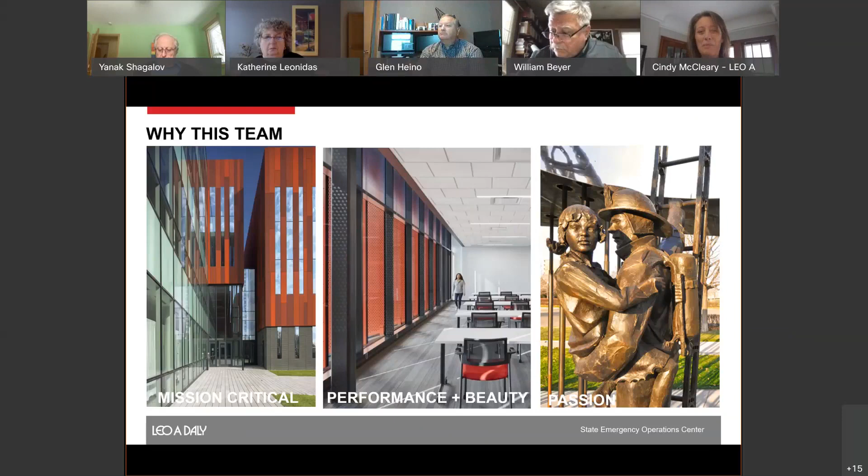My name is Cindy McCleary. I'm an architect. I'm the managing principal of the Minneapolis office of Leo A. Daly, and I'm the principal in charge on this project. And we brought a high caliber team to you today. Not only does Leo A. Daly bring this experience in the over 106 years that we have with expertise in Fed, BLAST, life safety, public safety, emergency management, we also brought a powerhouse team of Dunham engineers. And Dunham and Leo A. Daly have a long working history on mission critical facilities. We've done over 46 in the last 3 years together.

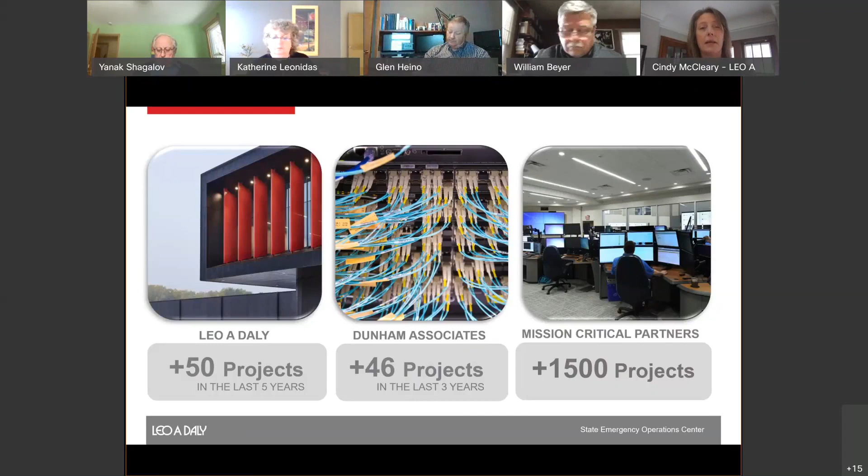And you're going to hear them talk a little bit about how they apply mission critical work to projects. And then we also brought Mission Critical Partners, who by far, hands down, is the national leading expert in these types of facilities. Not only have they done over 1,500 of them, but their 140 staff people are former emergency managers, public safety professionals, and emergency management professionals, and they bring the operational planning as well as some of the technical and logistics planning to the table. So I can't wait to introduce the rest of the team.

Thank you, Cindy. I'm Josh Hoyord, the project manager. Our core team is organized with a focus on programming and performance. Our program team is made up of Linn, Matthew, Pat, and Marcy. This team will help with site selection and conduct the programming efforts. The performance team includes Joshua, Tom, and Melissa.

This team will focus on the technical aspects of this facility, working closely with you and the programming team to ensure that the proper redundancy and technical performance is in place.

As the project manager, I will bring valuable lessons learned from delivering mission-critical facilities across our country, working with multiple agencies and stakeholders who have ongoing missions of their own to support, in addition to providing valuable insights to the design process. This has helped us refine the project management plan to define the proper scope, schedule, and accurate budget.

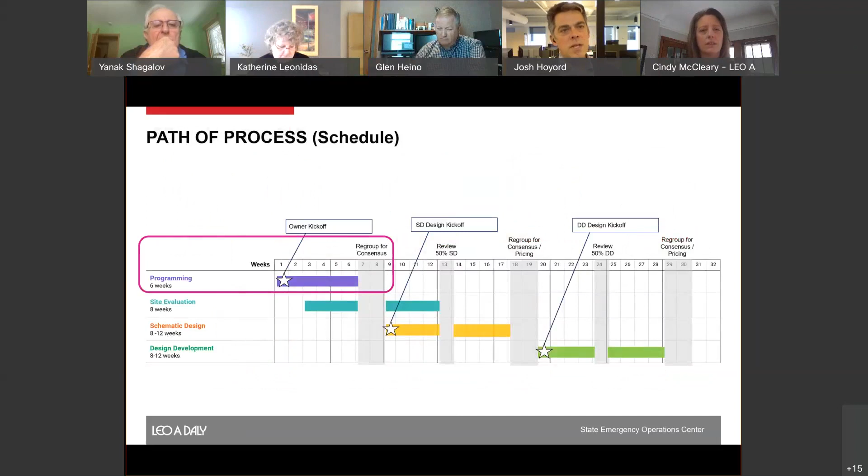We spend the time needed to develop the management plan because we know you're actively managing ongoing emergencies, and we value your time and want to make the most of it. The project management plan consists of the following items: communication plan, which identifies stakeholders and their roles and responsibilities, goal setting, risk assessment, and mitigation plans.

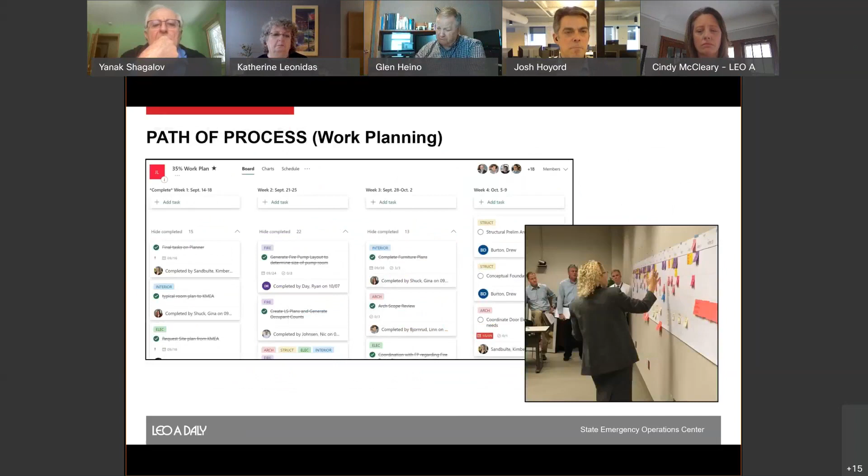Schedule development with pull planning exercises, where we utilized WebEx, Microsoft Teams, and Planner. A rigorous quality assurance and quality control plan with independent technical reviewers is used with Bluebeam Studio to allow for a secure cloud-based collaboration where we track, check, back check, and close out the review comments.

Last but not least, our construction budget analysis is done in concert with our construction cost estimator and integrates the selected construction manager at risk. This proven framework supports the creative process, encourages stakeholder engagement, captures the key design goals, and mitigates any potential risks during the design and construction phase.

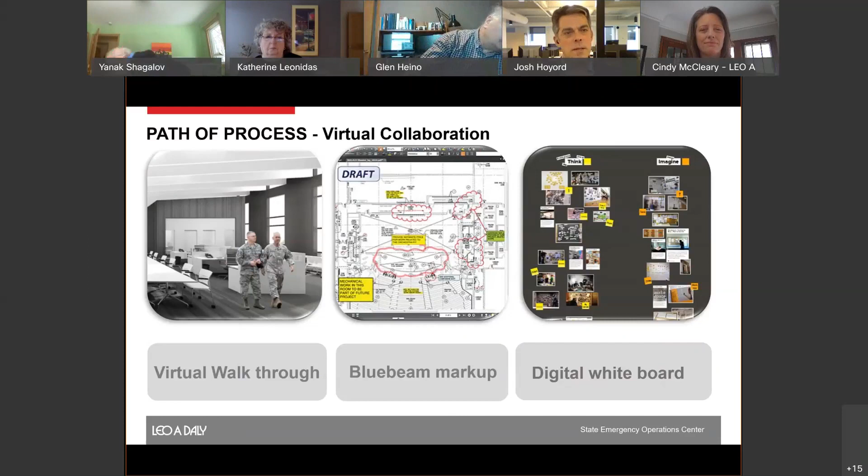With that, I'd like to turn it over to Linn Bjornrud, our project architect, to talk more about the planning and programming process. Thanks, Josh. So I'm Linn Bjornrud, and in my role as the lead architect, my charge is to ensure quality. Quality in our processes, quality in design, and most importantly, quality in our ability to execute your vision.

And while my commitment includes full engagement from pre-design through occupancy, I will be leaning in more heavily at key stages. For example, during the programming process, Matthew, Pat, Marcy, and I will be leveraging our collective experiences with emergency operation centers, mission critical design, site selection, and secure military facilities to provide diverse perspectives and guidance throughout that process. We value an engaged process, and it's during these programming exercises that we begin to understand what's most important to the users and the stakeholders.

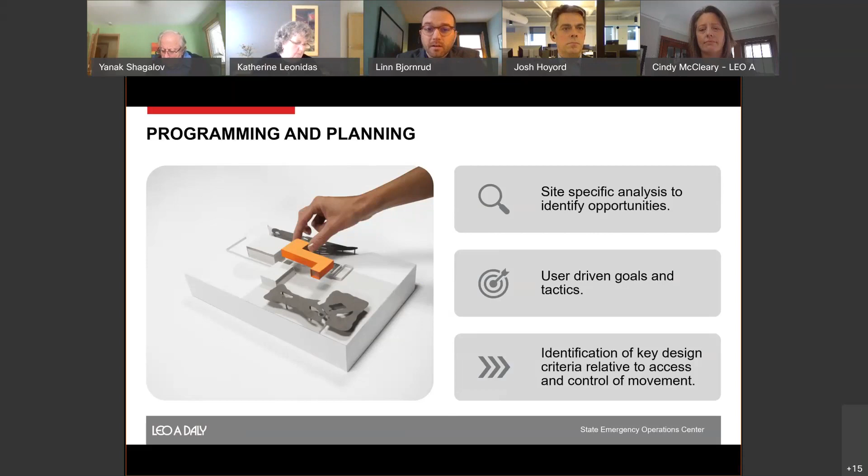It's also where we start to develop really critical design criteria related to the facility's resilience. And with our understanding of the implications of SCIF accreditation, ATFP compliance, and other military-based standards, we will help to navigate the difference between using these standards as a guide compared to formal compliance and accreditation of them.

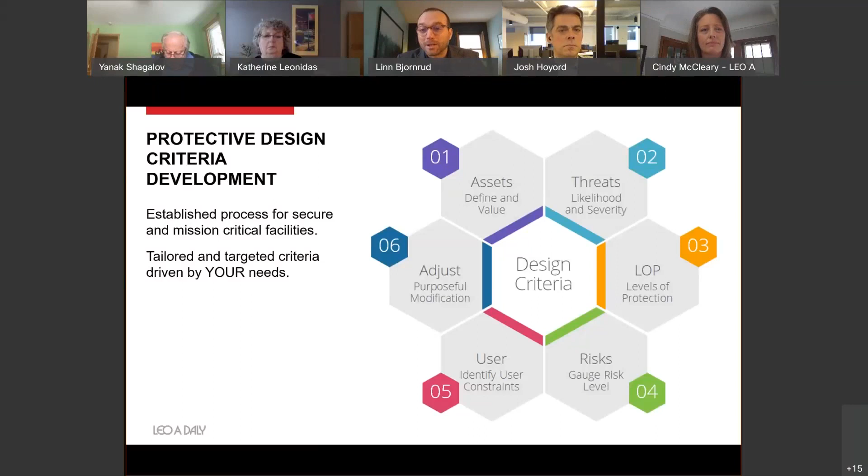And really that question will reverberate through the project, and it'll serve as a sounding board and a litmus test for us as we move through the project to identify the choices that we're making and assure that they're on target. It's essential that mission critical facilities focus on threat mitigation and resiliency, but let me be clear, achieving bunker-like performance does not require a bunker-like experience.

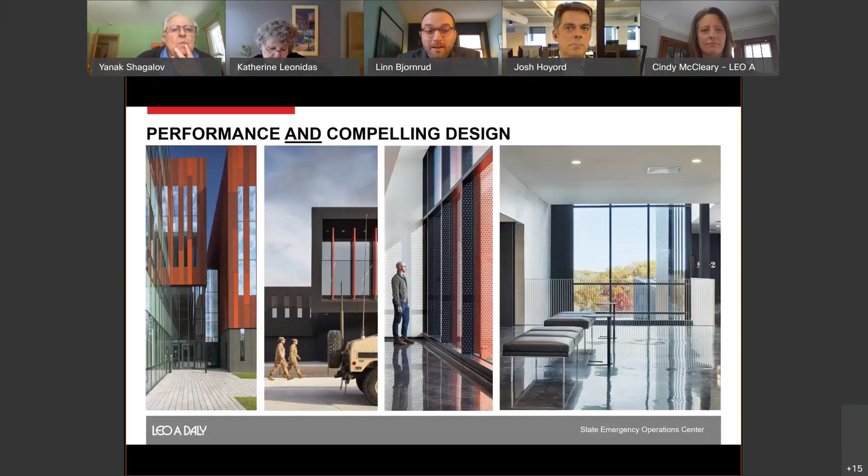As demonstrated by the project examples shown here on the screen, the Arden Hills Readiness Center, which was designed to accommodate fluctuations from 50 to 750 occupants, and the Intelligence Community Campus in Bethesda, Maryland, whose purpose was collaboration between multiple agencies, high-performing projects can be beautiful, and mission-critical constraints do not inhibit design. Next, Matthew's going to share a little bit more about his EOC-specific experience and the process of shaping spaces that not only support the functional, but also the experiential needs of the users.

Thank you, Linn. Good morning, everyone. My name is Matthew Keenan, and my role is the project designer. On a personal note, and as Cindy said towards the beginning, I too have a passion to serve those who serve others. I focused the majority of my career designing facilities for those in high security and high stress environments.

In my role, I'll work hand in hand with Linn on process and bring years of experience, layout, and system approaches to EOC design. In addition, I'm also a main point of contact, and I'll be coordinator of our engineering team and really our full team, as well as coordinating directly with you and the various user groups. We understand how critical it is to organize these types of spaces, ensuring this is a flexible, technical, highly effective functioning project and building. Our process in accomplishing this is built upon understanding you and your needs.

We like to use a day in the life approach, as determined with you, for both the use and the functional needs of the space. That helps us develop and evaluate scenarios with you and ensures the most appropriate layouts are considered, fully vetted, and we meet your mission. We focus on designing your facility around the operations and you, the users.

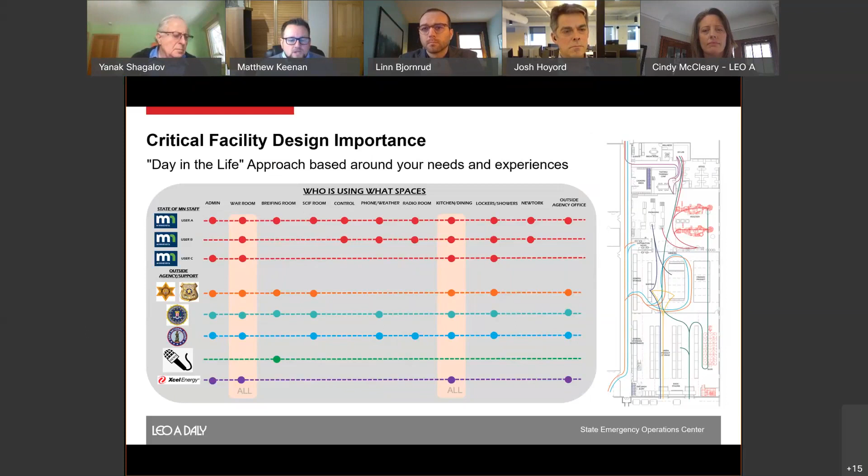We know the importance of separations, both physical and network-based, as Pat will mention a little later, and also the need for controlled areas and select barriers that can be enforced or not, depending on what's happening. One such consideration being providing a media dedicated entrance with limited interaction past a briefing room. Another being dedicated staff parking, so that people don't feel like they're being watched as they're coming and going. And those are just a couple examples before you've even really entered the facility.

We also place a lot of importance in the value of connection and flexibility of these types of buildings. We find a spiderweb type approach around the main incident room and war room is really critical and breeds success for these types of projects. A lot of these spaces have to blend around that same room and have interactions to this room and others. We like to take that day in the life approach to really make sure we get those adjacencies correct and really balance that connection and that movement.

Excuse me. Next slide, Kel.

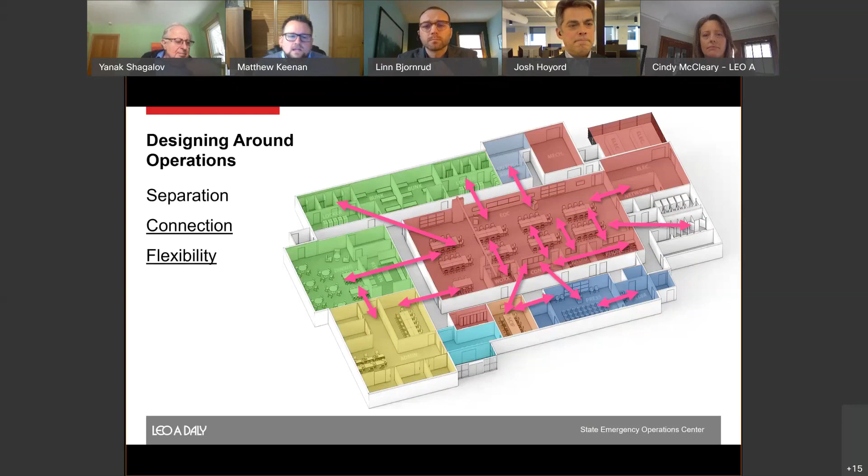One of the big key factors that we also consider is the human experience and wellness of this project. It's not just the IT and the building performance, it's also that human experience. And we really focus on using natural and soft materials so that we can provide spaces for decompression, isolation as needed, which are softer, warmer potentially, spaces for sight and visual separation to the exterior, and just really providing that human experience so that we can ensure that people have good wellness while using this facility.

We take a lot of these approaches that we know and that we bring to the table, but also really want to work with you and what you know and what you've developed, especially given this past year, and potentially change to really make sure we give you a facility that's going to work well.

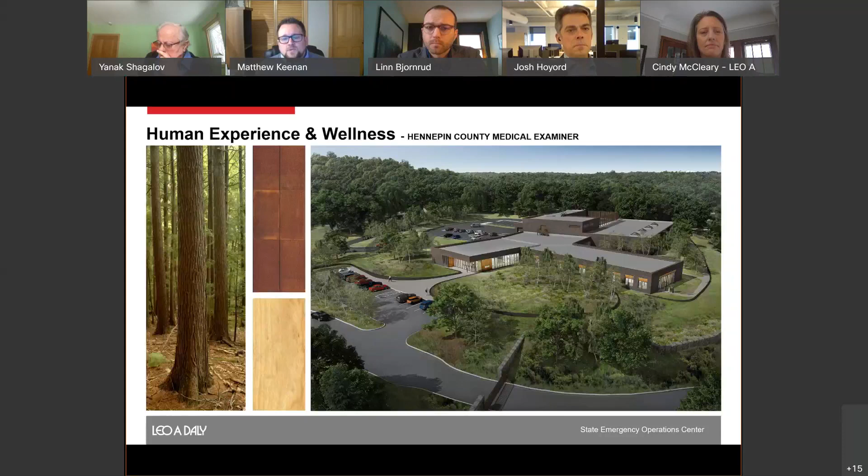A project case in point for the human experience would be the Hennepin County Medical Examiner project that I'm working with Marcy on right now, in which we really took the site into consideration and designed a building that took the exterior and made it something that was useful and could be used by staff, but also looking at natural materials, things of that nature that really helped ensure that human experience was foremost a consideration. Working with Pat, Mission Critical Partners, and the rest of our team, we really make sure that this project meets your needs and hits that vision and that mission.

Sure, and I'm Pat McFeely from Mission Critical Partners. We'll work closely during the programming stage with Linn and Matthew for figuring out how your operations actually work. One of the key design features of an emergency operations center is ensuring that the operations center is designed around your operational needs, not designing your operational needs around the center itself.

We'll take a look at the operations. We'll take a look at the critical use of data that you'll want to use throughout the facility. And we'll also take a look at the technology infrastructure, not just the building systems, but also your specialty systems like your SCIF room or your radio communications and phone infrastructure, to understand how it will all work together and ensure that the facilities are designed around that. We'll also take a look at changes in emergency operations centers that we're seeing due to COVID, be it traffic flow, increased airflows, or just being able to virtually use the space for separation of your personnel.

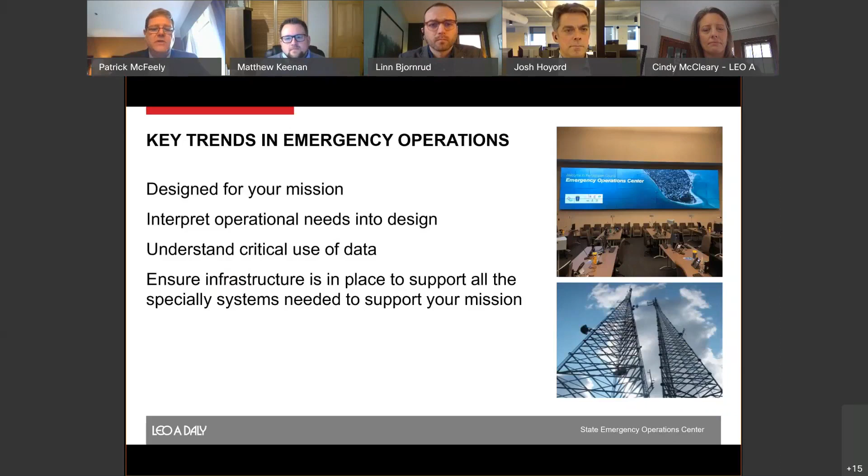Once the programming is done, we'll work closely with Joshua to ensure that the infrastructure is put in place to support your specialty systems. And I'll let Joshua talk a little bit about the building systems. Thank you very much. Hi, I'm Joshua Kam, electrical engineer. I'm here to help coordinate the power, lighting, communications, and other low voltage systems for this program. The utilities in this program cannot fail. Power, secure comm, water, gas, HVAC, loss of services is just not an option.

EOC ops is already stressful, and any disruption complicates coordination between the many agencies. This team will work with the program managers and directors and design for the appropriate level of redundancy and resiliency. We will validate the service connections and harden against inclement weather and terrorist actions. I'm a vet and now a traditional guardsman that was on state active duty this past year. Service continuity is my priority. Emergency managers must have a safe and reliable place where they can make decisions and communicate those decisions, whether it's during a pandemic, civil disturbance, protests, or disasters such as a flood, tornado, or fire.

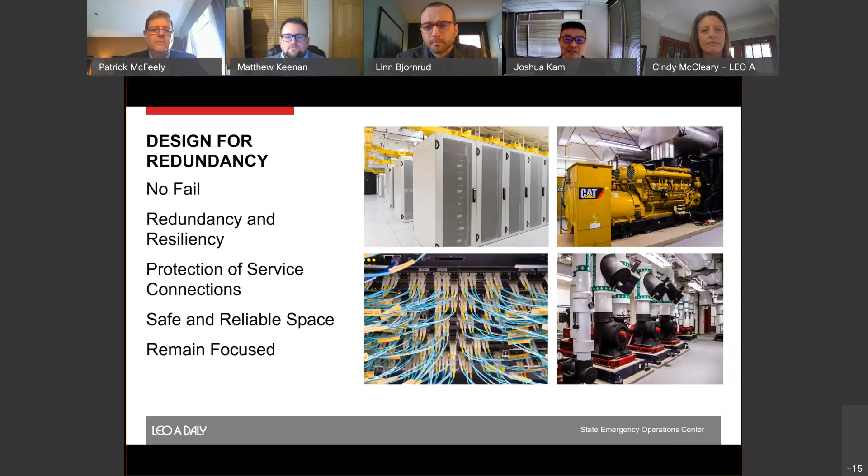Utilities are always underappreciated until there is an actual outage. We will work with you and provide a reliable facility so managers and agency directors can remain task focused. With the redundancy and resiliency requirements comes sustainability requirements. This team, Tom and I, have worked on many sustainable and efficient projects. And even by designing all those system complexities and redundancy, your facility will be energy efficient.

As Josh noted earlier, my name is Tom Jackson. I'm a mechanical engineer at Dunham Associates in the Mission Critical Business Unit. And while I enjoy creating environments for creature comfort, my passion is really creating a stable environment for critical IT systems. As the local chapter president of AFCOM, a national data center organization, I understand the complexities of all these systems and how they need to interact.

On this project, energy conservation is just the beginning. Our task here is more than just checking boxes of energy efficient saving measures, right? We want to create an integrated web of systems, living together in harmony, but it can't be done alone. Meeting the new B3 standards requires a full team coordination, and our companies have designed dozens of B3 certified projects, so we understand the paperwork and the process going from design phase all the way through operations.

But it's more than just energy savings on this facility. As Matthew noted earlier, your facility will be designed around wellness at its core, right? Through proper daylighting, lighting controls, outstanding indoor air quality, the employee wellness will increase. And when the employee wellness increases, your employee productivity will increase, which we all appreciate during an emergency.

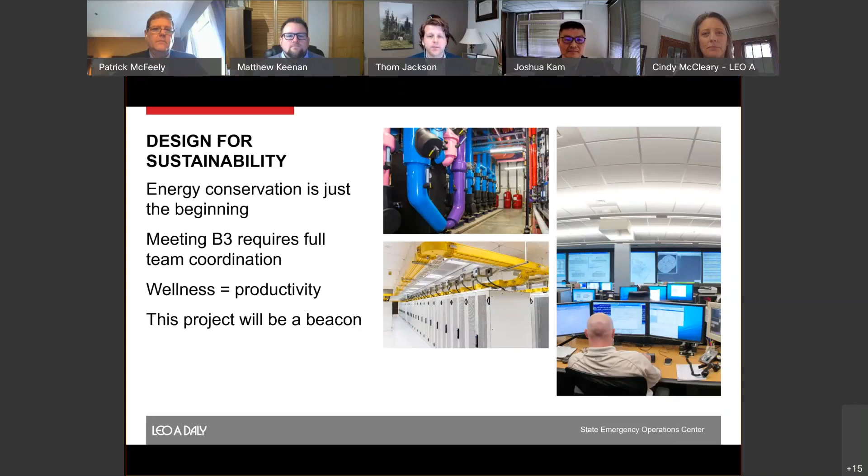This facility will show the state of Minnesota and all other critical projects across the country that a complex facility such as this can also be designed in an energy efficient method. But we can't design it however the heck we want to. There are many codes and standards that we must adhere to and apply, and Melisa will explain how we apply them.

Thanks, Thom. So I am a fire protection engineer at LEO A DALY. But more than just ensuring that you will have an excellent sprinkler and fire alarm system design, my specialty is really going to be shown in the code analysis and life safety features of your building. Throughout my career, I am very proud to be involved in various codes and standards councils and technical committees. So through this, I have been directly involved in the process of developing codes and standards like NFPA 13R and D and NFPA 14.

My experience in this code development process means that more than just broadly applying code requirements, I have a deeper understanding of why the codes are written that way, what the intent is behind the requirements that are listed in the various codes and standards. So not only do we know the codes very well, we know how to apply them. And I'm there to help coordinate those efforts across our team and with you as well as our client.

NFPA 1221 is one of those standards that is definitely a robust standard that has a long list of requirements for emergency operations centers. And we know that one very well and can help navigate that standard, along with the various FEMA standards that I'm sure you're aware of, 361, 426, 452, et cetera. They all assist in the construction of a robust emergency operations center for the state of Minnesota. And the combination of my experience, along with Pat's, Thom's, and Joshua's, in interpreting this long list of requirements will be crucial in the way that we design this building for you.

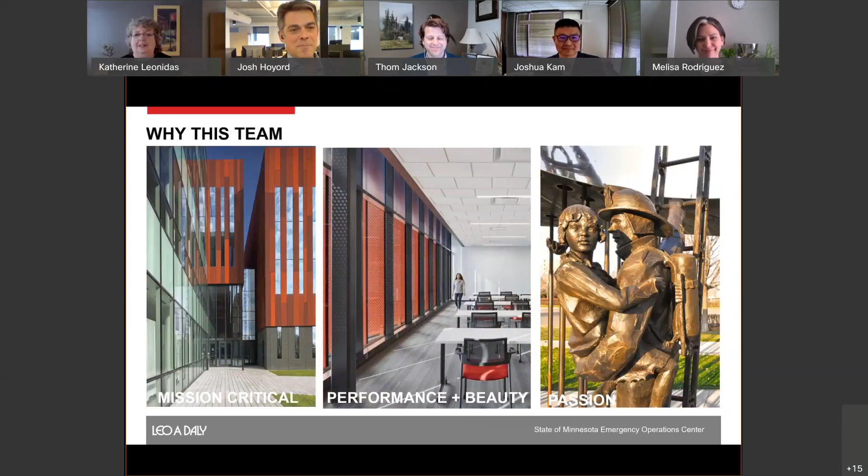So with that, do you have any specific questions? Yes, absolutely. So what we're going to do is, we find a lot of value in these. Yeah, we do. So with that, we're going to turn the first question actually over to Glenn, Joe, or Kevin. Yeah, hi, this is Glenn. I'll take the first one.

I guess this question would be directed to either Matthew or Pat. Of all the operation centers you've done, which one would you most closely relate to the state's need for an emergency operations center? And since its occupation, what lessons have you learned?

Matthew, do you want to jump in first and then follow up with Pat?

Yeah, not a problem. A lot of the EOC type facilities I've worked on, especially in the state of Minnesota, have been on the county level. And really, the biggest piece that I've noticed that is important and has been a consideration taken away is the flexibility need. Really ensuring that multi-users can use multiple spaces and that those spaces have multiple functions. I've done a few different throughout the state for a lot of different county work. And I think bringing multiple groups together is really the key, some of the glue that I've found is needed for this project.

Sure, and on my end of it, I would say probably closely related to what you're planning to put in place would be the Pennsylvania Emergency Management Agency, Emergency Operations Center for Pennsylvania. Followed up by the Kentucky Emergency Management Agency, state EOC, and then probably Pueblo County, Colorado, which is the backup EOC for the state of Colorado. Those would be three close. And then I have also a slew of joint EOCs and 911 centers at more of a county level.